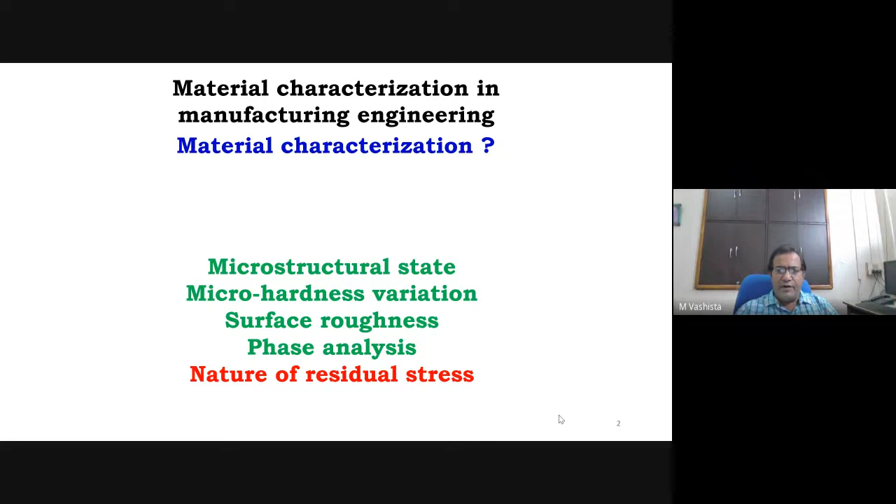Now, why in manufacturing do we have to deal with material characterization? In manufacturing we can use various machines and processes, but is material characterization required? Let us have a look. Generally, we have to qualify the product through a quality control department, which assesses the quality of the manufactured product. When it does so, the term surface integrity is used to indicate the quality of the produced component.

Surface integrity of a product is a set of elements: microstructure, hardness variation, surface roughness, phase analysis, and residual stress. These elements coincide with the elements of material characterization. That is why the quality of the manufactured product can only be assessed by characterization of the material. Hence, material characterization is very important in manufacturing engineering, because we cannot ship the produced component to the market or customer unless we have information about its quality, and this we know only through characterization.

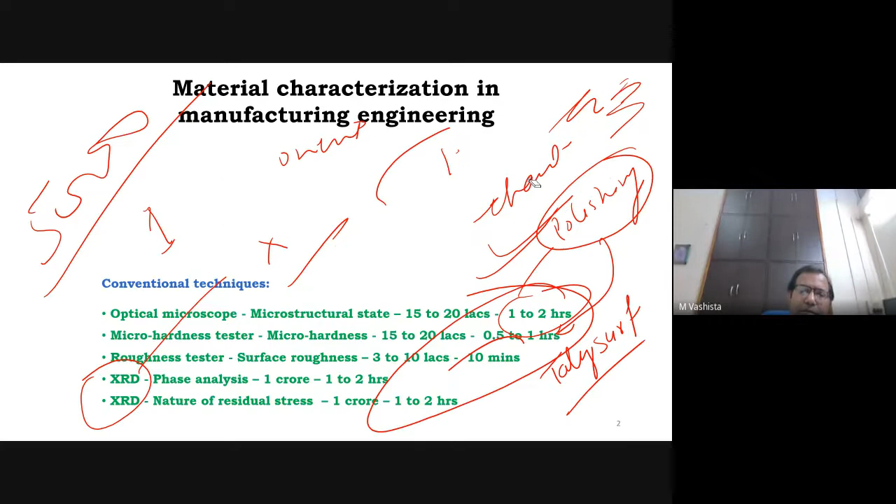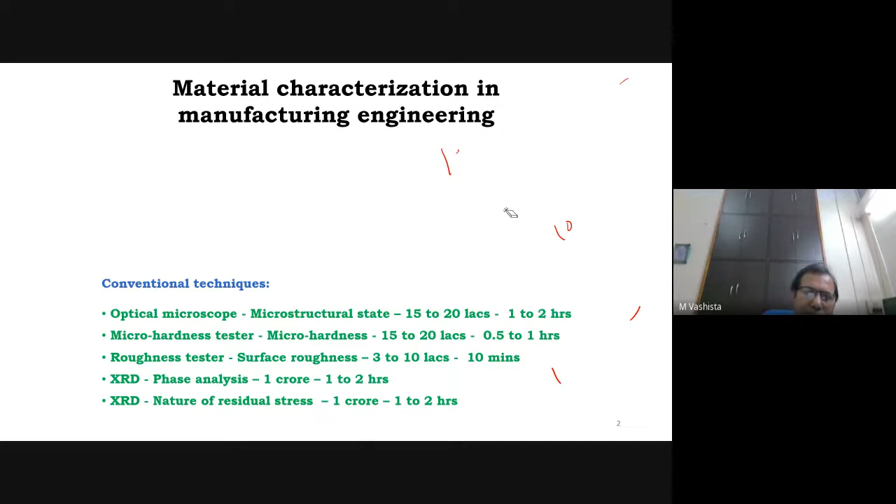We have to replace this technique nowadays. Whenever we are going to submit a project proposal, जब भी हम submit करने जाते हैं किसी project proposal को, then whether it is a DST or whether it is a BARC, it is simply informed to us that the project proposal should be environmental friendly. Okay, if we have to go for development of a product, then we have to say that it is eco-friendly or environmental friendly. So we have to use a technique for material characterization that will be user friendly as well as eco-friendly also.

We have seen that the time taken, if we consider conventional techniques like micro hardness tester, roughness tester, X-ray diffraction technique, is around 3 hours, and that is not possible in nowadays modern manufacturing industries practice, because we have to reduce the time. We have converted our conventional machining center into the CNC machining center by reducing the setup time or holding time. Similarly, we cannot devote such amount of time in quality control. So we have to consider one technique that is having name Barkhausen Noise technique.

The technique, a single technique, can assess micro hardness, it can assess microstructure, phase analysis, even nature of residual stress and its magnitude. Qualitatively, it can inform. It is very much interesting that the time taken to check all these is 5 minutes. The cost of the equipment is 15 lakhs.

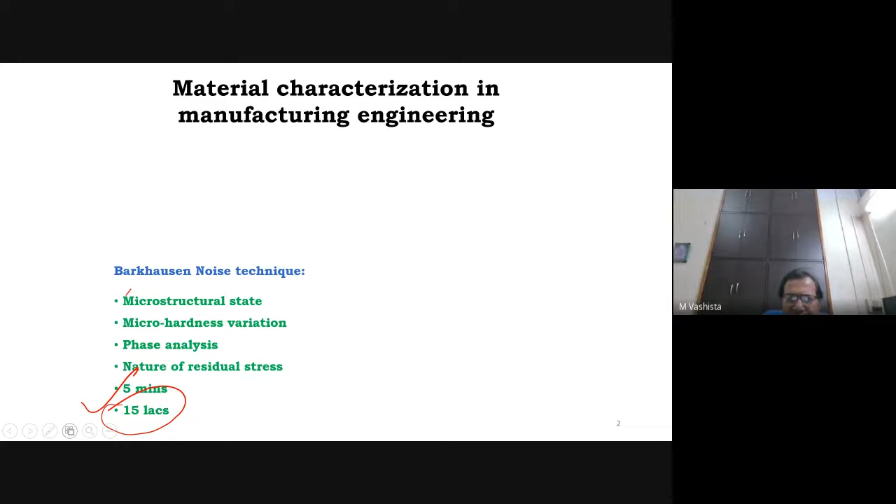Conventional characterization technique, if we look, then first inspection of the product. Whenever we are going to produce a component in machining shop, the first inspection is going to be by naked eye. The visual inspection assesses the color of the component, whether it is having very dark thermal damage portion or not, whether the surface is smooth, whether the surface irregularities are minimum or maximum. That can be carried out by visual inspection. Then micro hardness testing, metallography analysis, and surface finish. These are required to check micro hardness variation, microstructure, and surface irregularities.

X-ray diffraction technique uses a transmitter and a receiver as well as X-ray. So from transmitter, X-ray is transmitted to the workpiece. Then after diffraction, they are received by a receiver, and this receiver informs about the magnitude of residual stress by using Bragg's law. In megapascal, we get the magnitude and nature of residual stress, but the harmful factor is the use of X-ray. The use of X-ray is not desirable.

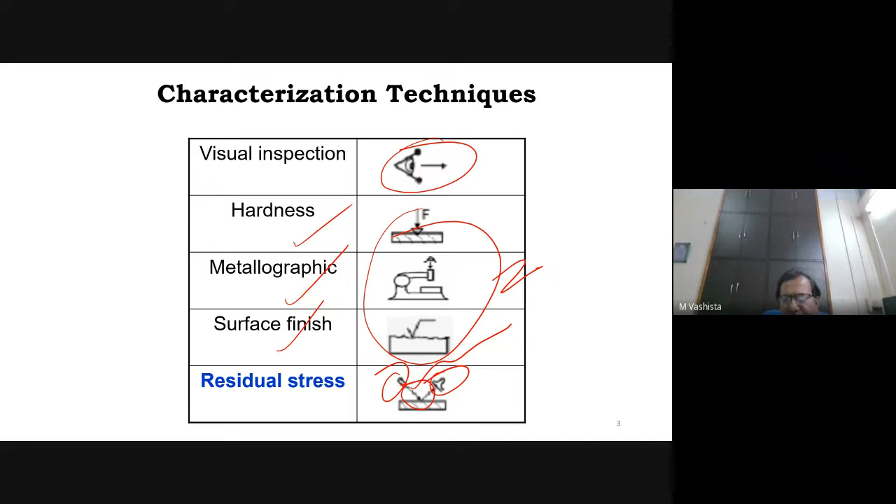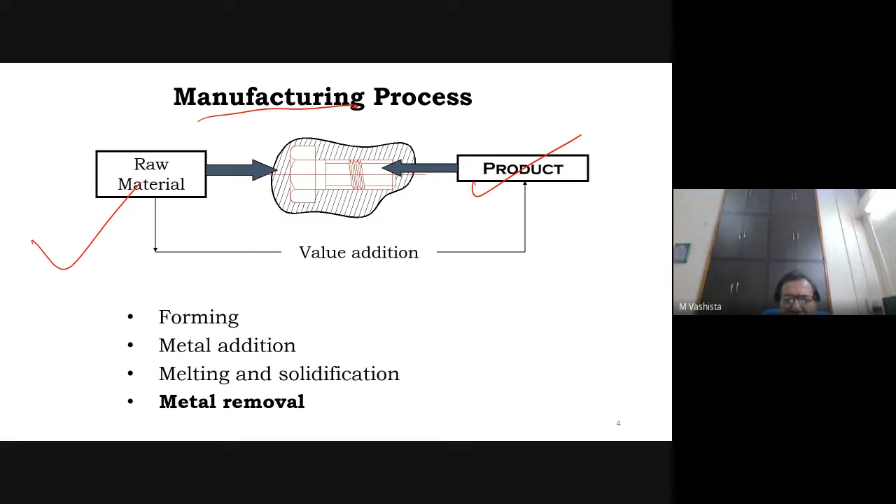Let us go quickly in manufacturing process, because our theme is application of material characterization in manufacturing process to check the quality. If we look into this term manufacturing, then it is simply conversion of raw material into a product by using any process, and there should be value addition. Unless we are having value addition, we cannot declare it is a manufacturing process.

Suppose I am having a lump of iron, and with the help of some compression machine or compression die and punch, I have compressed this component like this, considering this is a very ductile material. So the conversion of shape is there, process is there, but this component after compression is not having any value. Its value is 0. So this is not the manufacturing process. But if I remove these lines by shaper, then I will get a rectangular piece. And this rectangular block I can use as a paperweight at least. In this case, value addition is there. So this will be a manufacturing process.

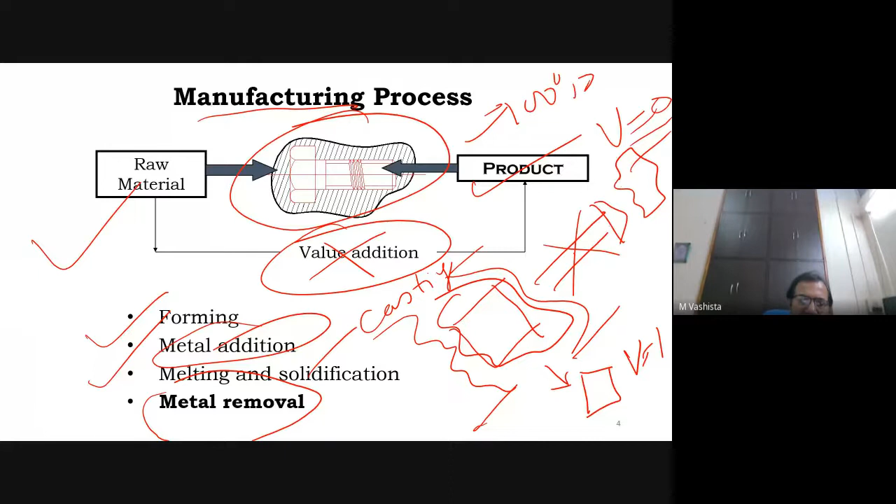Manufacturing process we can easily classify into forming, metal addition, that is welding, soldering, brazing, melting and solidification, means casting process, and last one is metal removal. This intentionally I have kept in bold color, because if I consider manufacturing process as 100% proportion, then this portion takes major portion of manufacturing process. Global study has indicated that 60 to 65% of manufacturing operations are carried out by metal removal category. It means machining category. So this is very important in manufacturing.

And unfortunately, if I consider any metal removal process like drilling, boring, threading, knurling, turning operation, milling operation, shaping operation, in all these operations there is contact between the workpiece and the cutting tool, and large amount of heat is generated. Heavy plastic deformation, large amount of heat generation, it is not desirable. Why it is not desirable? Because it will change the property of the material non-uniformly, and this is not required by the customer. The non-uniformity in property is not good for a field application.

In field application, the component will be exposed to the rainy condition, extreme cold condition and extreme summer condition also. If it is having non-uniform property, then definitely it will fail during its service life. So we have to characterize the material before we serve it in field application, or before we supply it to the customer.

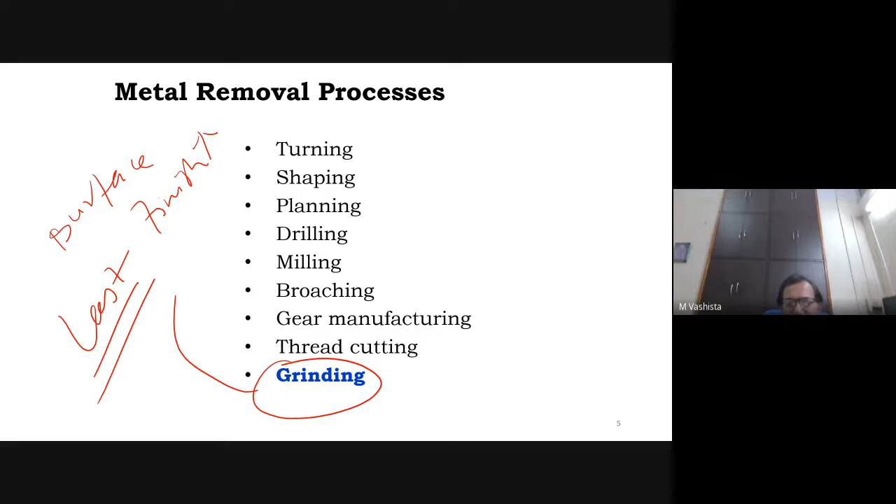Among these processes, grinding process is very important, because this is the last machining process. It is the last tooling process. After completion of this process, we will get good surface finish. Surface finish will increase after grinding process, because we say it is a finishing operation. But remember, it is a finishing operation, but it comes under metal removal category. So it is the last process. I have considered this process only to highlight the importance of material characterization. Okay.

Grinding process is the last tooling process, and it governs the quality of the component, because after this process the machining or manufacturing part gets complete and the product goes to the quality control department.

Unfortunately, in grinding this thing happens - generation of spark that we have all seen, and this spark is very detrimental.

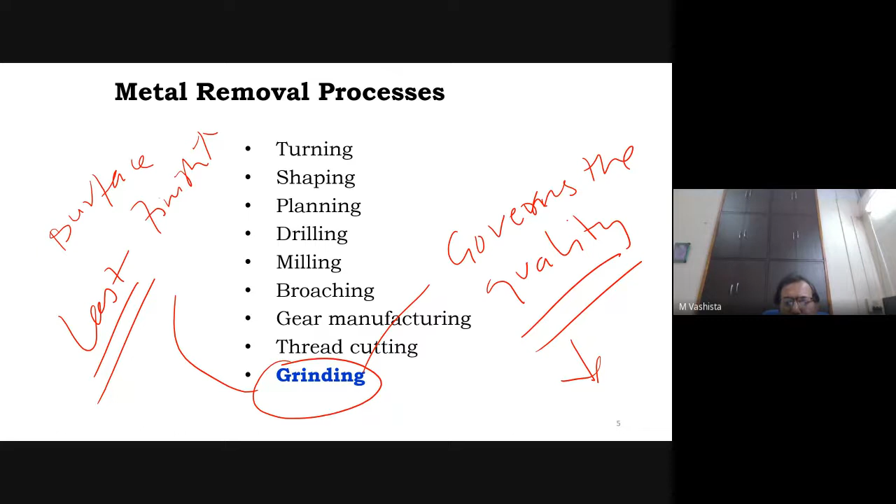Considering turning process, shaping process, planning, drilling, milling, broaching, thread cutting, gear manufacturing - in these processes spark is not generated. But only in the last manufacturing process, or last tooling process, sparks are generated.

The process that provides high surface finish quality to the component is the same process generating spark. Spark means intense heat over the top surface of the component. This intense heat application will definitely create thermal damage, and it will distort the quality of the manufactured component.

Why is this spark generated? Let us find out, then we will go about the material characterization. In grinding process, whenever there is contact between the grinding wheel and the workpiece surface, immediately at the contact we see spark generated, even without giving depth of cut. So why is this spark generated in grinding?

This is the schematic diagram of a grinding wheel and workpiece. Grinding wheel is composed of a binder. It also has abrasive grit, and it also has porosity. So grinding wheel is composed of binding material, abrasive grit, and porosity.

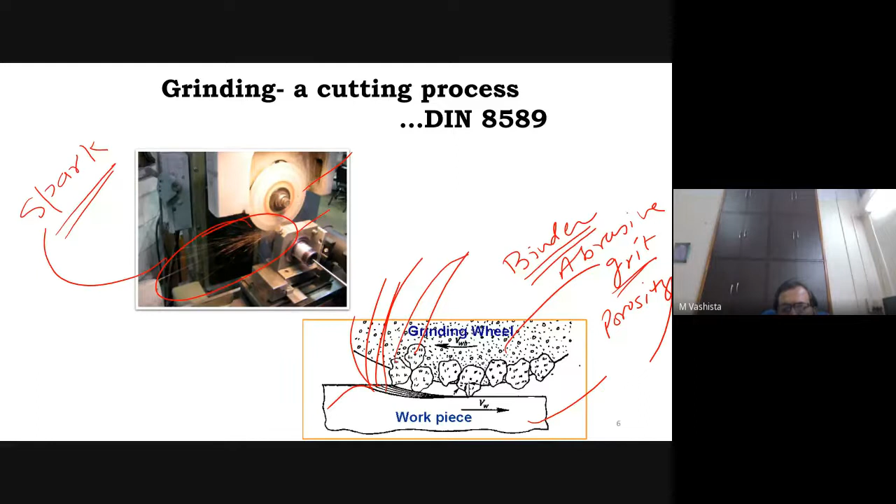So what happens with this abrasive grit of irregular shape and geometry? They are used to remove material in a layer-by-layer fashion, visible from the top surface. But still the question is: why is this heat generated by abrasive grit? Let us first talk about something related to tool geometry.

I am considering a cylindrical workpiece, the side view. A turning operation is carried out over this cylindrical workpiece. A single point cutting tool is making contact with the cylindrical workpiece so that the turning operation can be carried out.

Single point cutting tool can be positive rake or negative rake - positive rake and negative rake. How can we declare whether it is positive rake or negative rake?

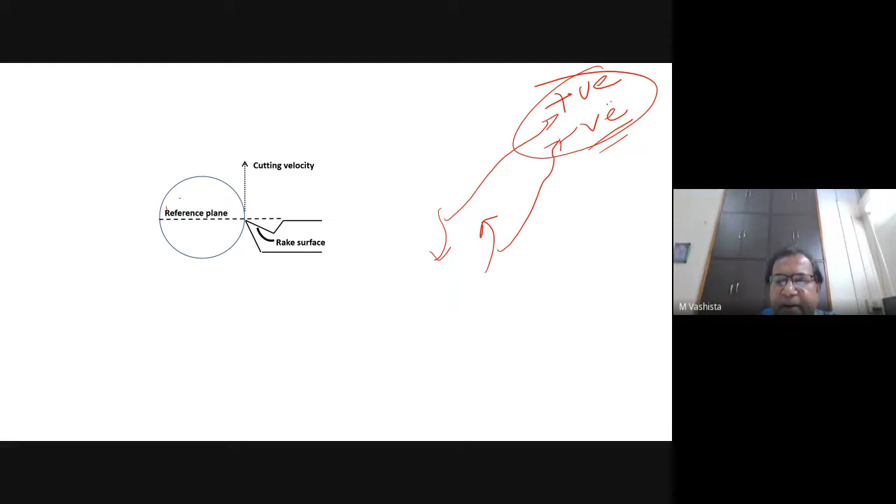Now, how do we decide if it is positive rake or negative rake? This is the interesting fact. Always rotate the reference plane toward the rake surface. If this direction of rotation is clockwise, it is positive rake. If the direction of rotation is anti-clockwise, it is negative rake. This is the simple fundamental we have to keep in mind: rotate the reference plane toward the rake surface.

So in this case, this rotation is in this direction, which is the clockwise direction. So this angle is positive rake.

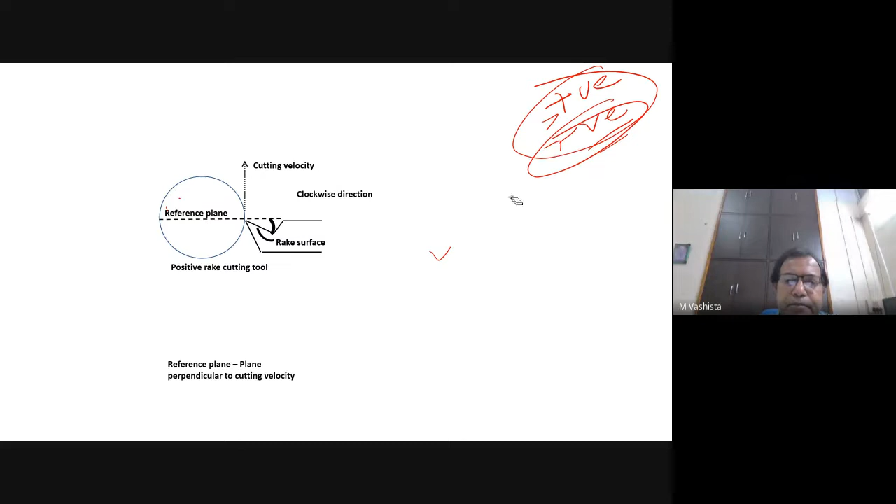Considering another example, the shape of the tool is like this. We will go by the fundamental. First, we have to locate the contact point. This is the contact point. We have to draw a tangent to indicate the cutting velocity, so the tangent will indicate the direction of cutting velocity. After showing the direction of cutting velocity, we can easily locate the reference plane. This is the reference plane. It is a plane perpendicular to the cutting velocity.

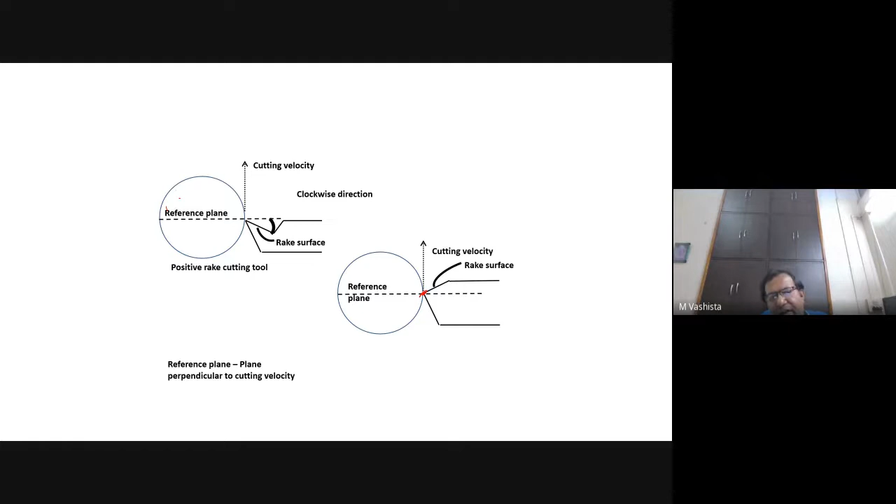Rake surface location is here. In this case, again, we have to rotate the reference plane toward the rake surface to see whether it is a clockwise or anti-clockwise direction. If it is a clockwise rotation, then it will be positive rake. But in this case, when we are rotating the reference plane toward the rake surface, it is negative rake because it is anti-clockwise direction. So this anti-clockwise direction indicates this is a negative rake cutting tool. Positive rake cutting tools and negative rake cutting tools are very popular in machining.

Whenever we have to say the difference between positive rake cutting tool and negative rake cutting tool, we typically say that in case of negative rake cutting tool, a large amount of cutting force is generated. Why are large amounts of cutting force generated in negative rake cutting tool? Somewhere I have seen it explained as more penetration area or more contact area, that is the reason for this more cutting force in case of negative rake cutting tool.

But we have to look into the fundamental. We have to apply the physics fundamentals to verify or validate this fact, that in case of negative rake angle, the amount of cutting force will be large.

Consider a chip. This is a chip, it is coming out from this workpiece material. So here it is the portion of the workpiece material, and after failure or after going through the shear mechanism, it will separate out from the workpiece material and it will flow over the rake surface like this.

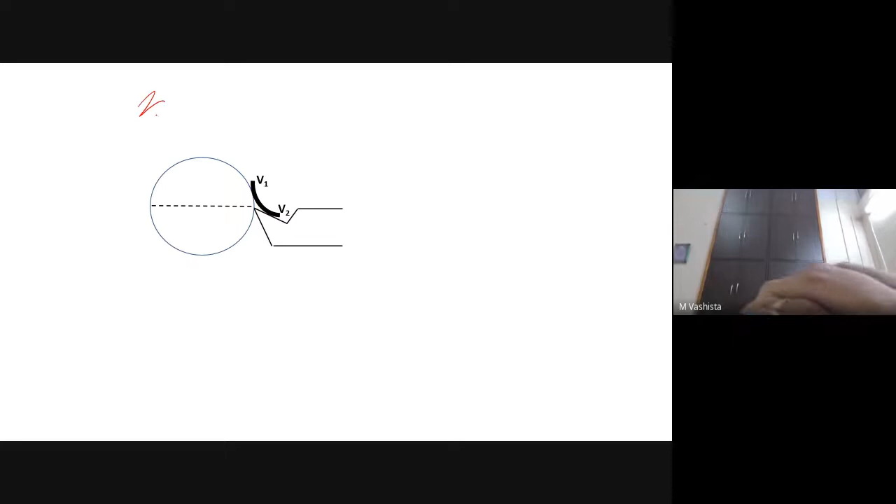The direction of flow of the chip has been indicated. When the chip is a part of the workpiece, it is having velocity V1, and when it is rubbing or moving over the rake surface, it is having a different velocity. That we know very well, chip velocity before cutting and chip velocity after cutting. So the same designation I am using here: V1 is the velocity of chip before cutting and V2 is the velocity of chip after cutting. I am considering this as an element having mass m, this chip is having mass m, its mass is small m.

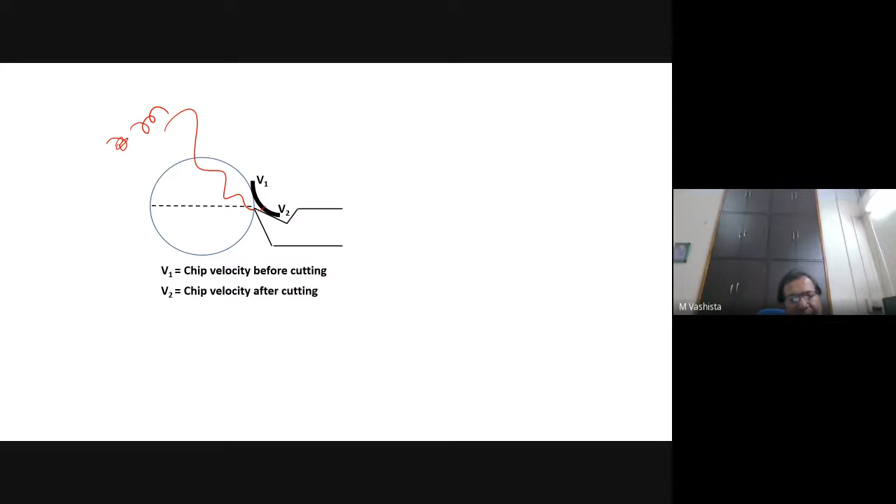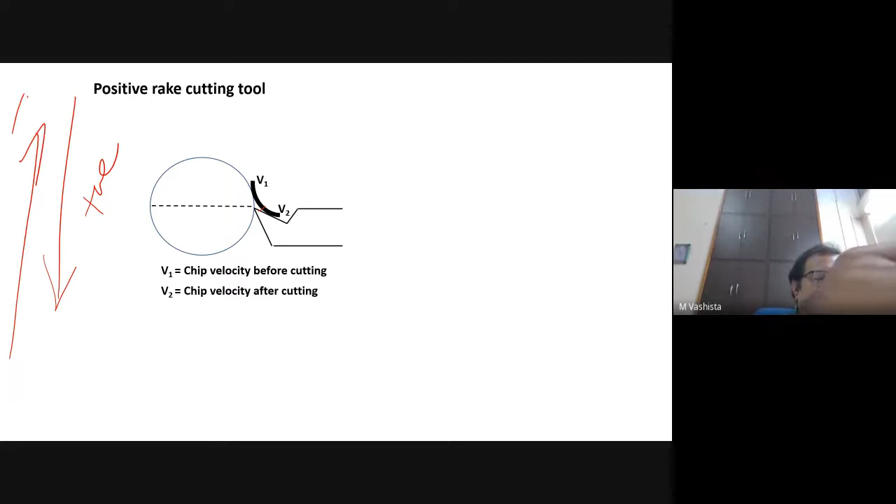V1 is chip velocity before cutting, V2 is chip velocity after cutting. In case of a positive rake cutting tool, this is the schematic. I am considering downward direction as positive and upward direction as negative. So in this case, V1 is in downward direction, V2 is also in downward direction, and the component is in downward direction.

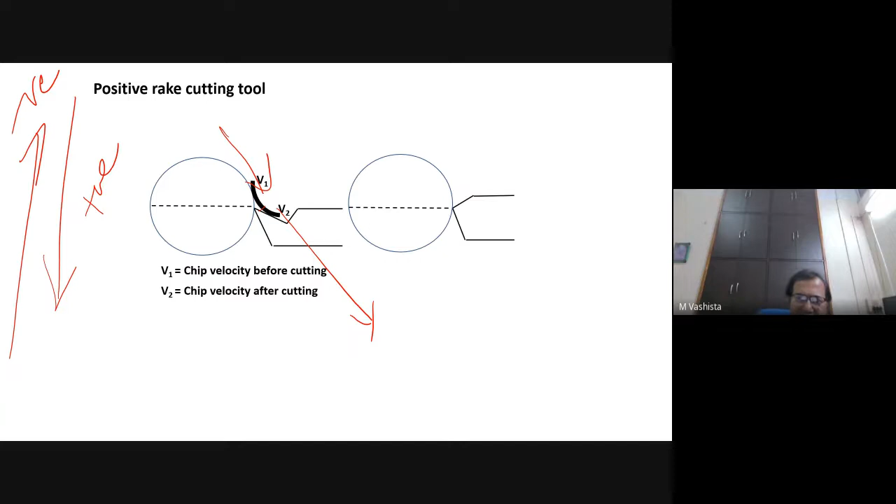But if I consider the same machining operation using the same workpiece and same process parameters, but simply replace the positive rake cutting tool with a negative rake cutting tool, what will happen? The direction of flow of chip will change. It will be like this.

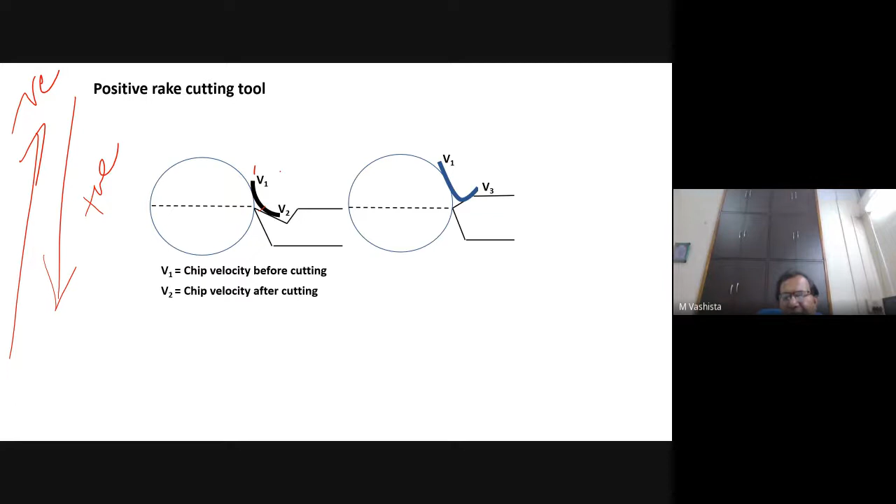Again, since process parameters and workpiece are the same, the initial velocity will still be V1, but the final velocity will not be V2 - it will definitely be different. Suppose it is V3. So V1 is the chip velocity before cutting and V3 is the chip velocity after cutting in case of negative rake cutting tool.

Considering the positive rake cutting tool, change in momentum is mv1 minus mv2, since momentum is the product of mass and velocity. We know that the amount of force is directly proportional to momentum, so there is a direct correlation between force and momentum. In case of positive rake cutting tool, change in momentum is mv1 minus mv2, and in case of negative rake cutting tool, change in momentum will be mv1 minus minus mv3.

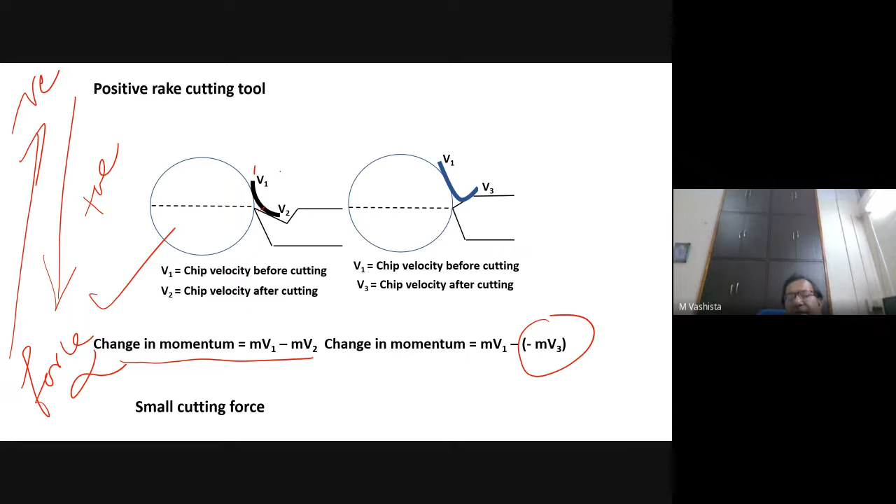Why? Because this is downward direction and this has an upward component. Since I have taken upward as negative and downward direction as positive, I will have to write change in momentum as mv1 minus minus mv3. So what will happen? This amount will definitely be more than the other. This indicates that a larger amount of cutting force will be generated in case of the negative rake cutting tool.

The same principle is also used for this very essential step of manufacturing. Whenever we have to perform a turning operation, we have to follow one guideline: we must ensure that the contact point is exactly at the diametric plane.

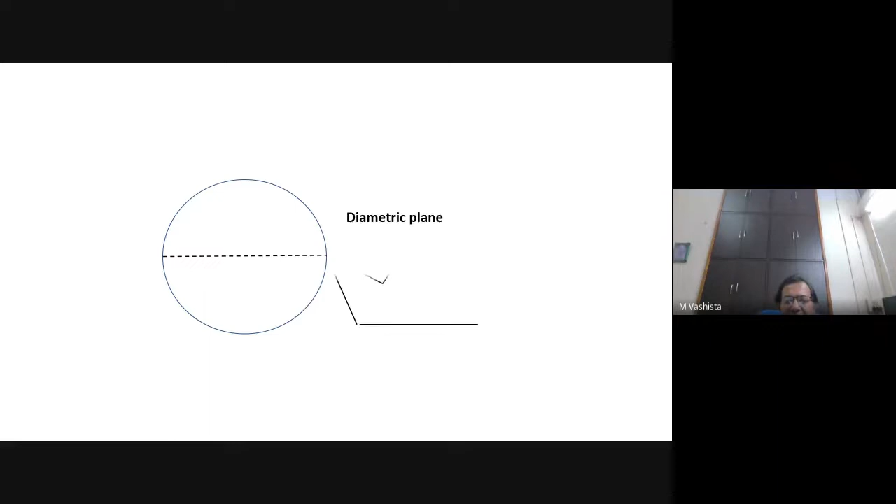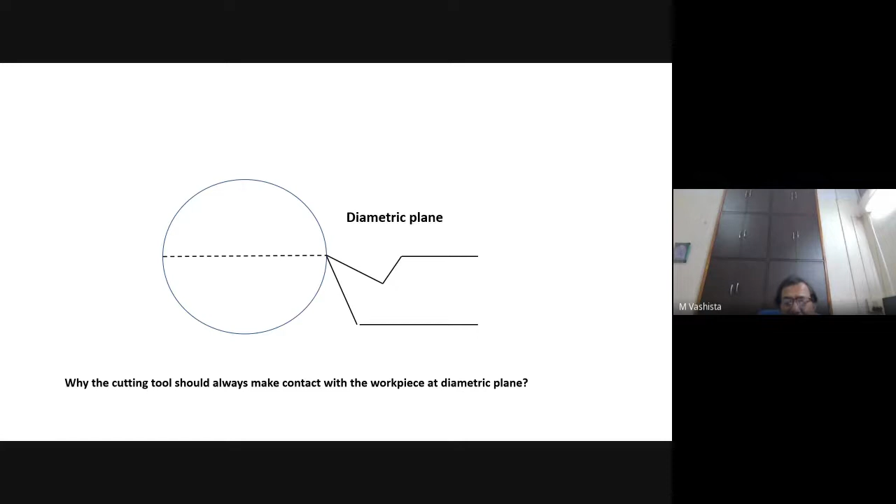But why are we told that the contact point between the cutting tool and the workpiece should exactly be at the diametric plane? This contact exactly at the diametric plane requires a hit and trial method, and it will also take a lot of time. So why is it required? It is again related to the same fundamental principle we have just seen.

Suppose the contact point is exactly at the diametric plane for a machining operation. The supervisor or manufacturing engineer told the machinist or operator running the lathe machine to use a positive rake cutting tool, with that positive rake being 10 degrees. You have to perform this machining operation with a positive rake cutting tool having a 10 degree rake angle. So the operator issued this tool from the tool shop, or received it from the dealer, and started his machining.

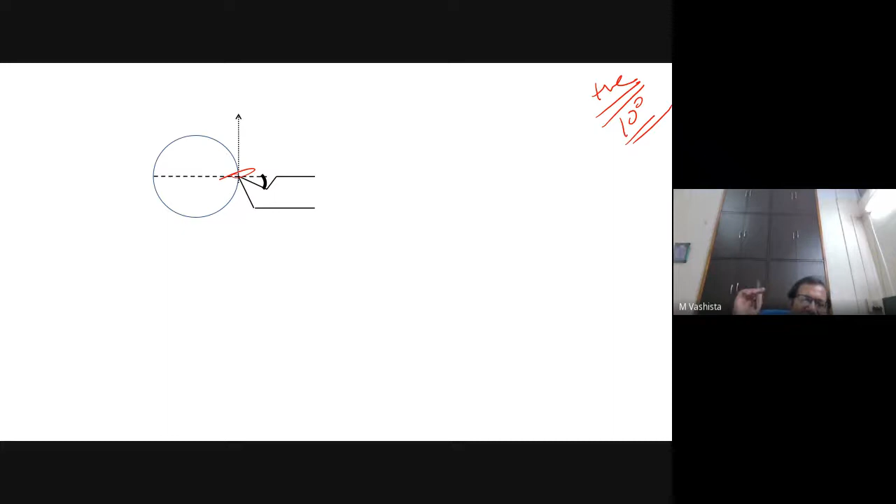First case I am considering: the contact point is exactly at the diametric plane. In this case, this will be the rake angle. Rake angle is the angle of inclination of the rake surface from the reference plane - the angle between the reference plane and rake surface. So this rake angle will be exactly equal to 10 degrees.

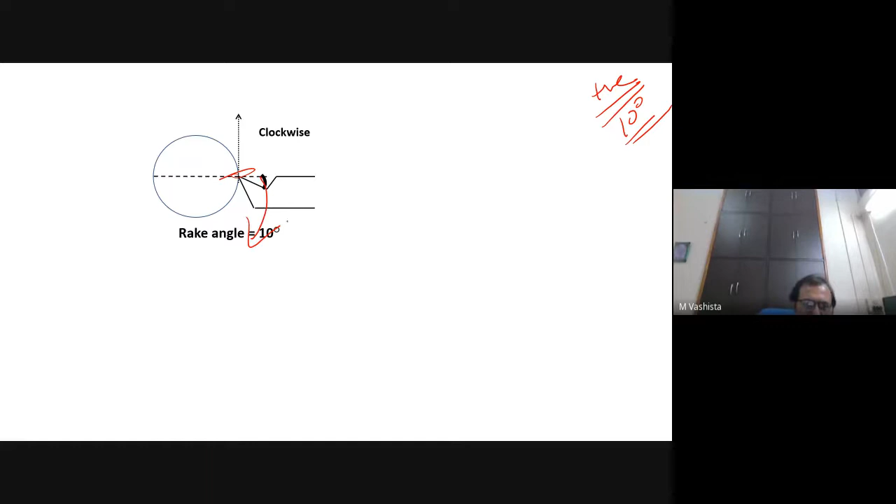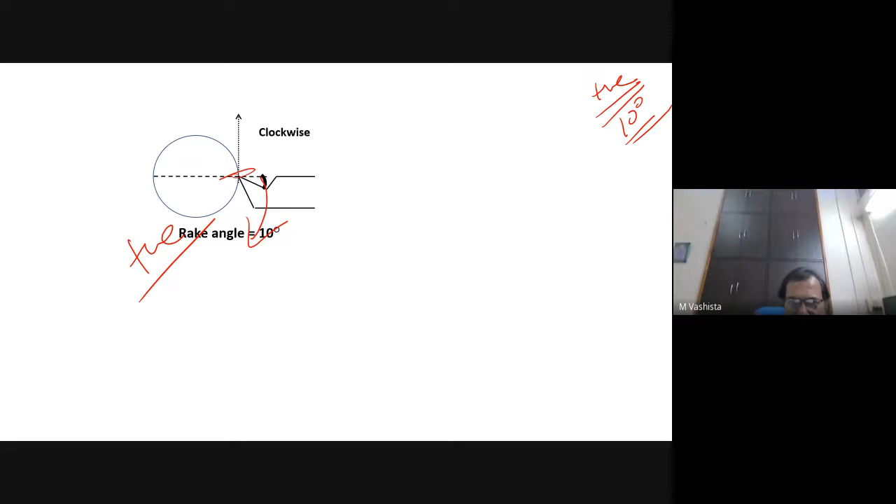And this rotation is simply in the clockwise direction. The direction of rotation of reference plane towards rake surface is clockwise, so this will be a positive rake. But by mistake, if the operator does not make contact exactly at the diametric plane, then what will happen?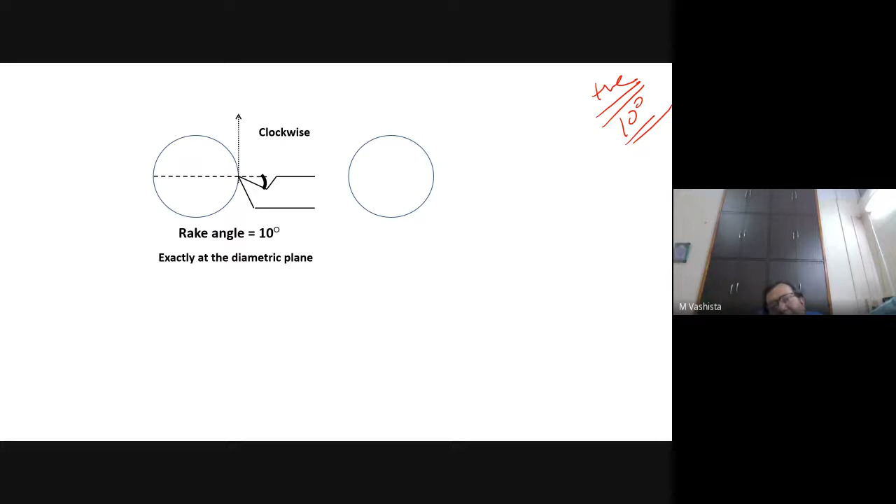There will be two cases: either the contact point will be above the diametric plane, or it will be below the diametric plane. In each case, what will happen? The first case I am considering is when it is above the diametric plane. So I will apply the same fundamental. First, I have to locate the contact point - this is the contact point.

At the contact point, I will first draw a tangent to indicate the direction of cutting velocity. So this is the tangent at the contact point, indicating the direction of cutting velocity. When I have the direction of cutting velocity, I can locate the reference plane - it is a plane perpendicular to the cutting velocity. Now, after locating the reference plane, this angle between the reference plane and rake surface has increased.

So I have got a tool that is having 10 degree rake angle, but by mistake I have shifted the location point. So I am performing the machining operation with a tool that is having large rake angle, positive rake angle. This large positive rake angle, maybe 15, and that is not desired by the supervisor or the manufacturing engineer, who has informed the operator that you have to carry out the operation with 10 degree rake tool.

Unfortunately, what will happen when the contact point will be below the diametric plane? In this case, the contact between the cutting tool and the workpiece is below the diametric plane. Fundamental I will follow. Again, I will draw a cutting velocity vector at the contact point. This is the direction of cutting velocity vector. I will have to draw reference plane. Reference plane is nothing but a plane that is perpendicular to the cutting velocity. So this is the plane.

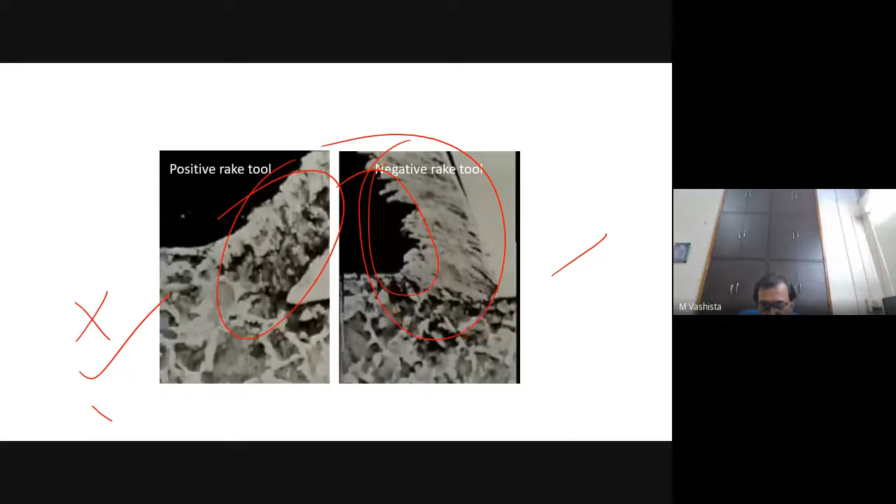In negative rake cutting tool, amount of plastic deformation is quite large. The thickness of the chip is large. Serration mark, you can see these are the serration marks, zigzag marks. So these are also very large, very significant in case of negative rake cutting tool. So we can say that cutting force is very large in case of negative rake cutting tool. Plastic deformation is very large in case of negative rake cutting tool. Hence, large amount of heat is generated, and this heat is not desirable.

So why are we discussing positive rake, negative rake in this topic, in this talk? Because the heat generation or the spark generation in grinding is related with this fundamental. The fundamental that we have discussed just now regarding the negative rake cutting tool, it is mainly responsible for generation of spark in grinding process.

When we provide the negative rake cutting tool over the single point cutting tool or milling cutter, then we keep the negativity in low range, typically minus 15 degree, minus 10 degree, minus 8 degree like this. Because higher negativity will indicate large amount of cutting force with significant plastic deformation. So we have to keep this in low range, generally below minus 15 degree. What happens in case of grinding?

To explain, I am using a grinding wheel. This is the grinding wheel, and I am considering only a single abrasive grit. To explain the generation of spark, I am considering a single abrasive grit because it is acting as a cutting tool. So I am having a pyramidal shape cutting tool. Although the abrasive grits are having irregular shape, experimental results and simulation results indicate they are having semi-pyramidal shape like this. So I am using a semi-pyramidal tool that is known as abrasive grit.

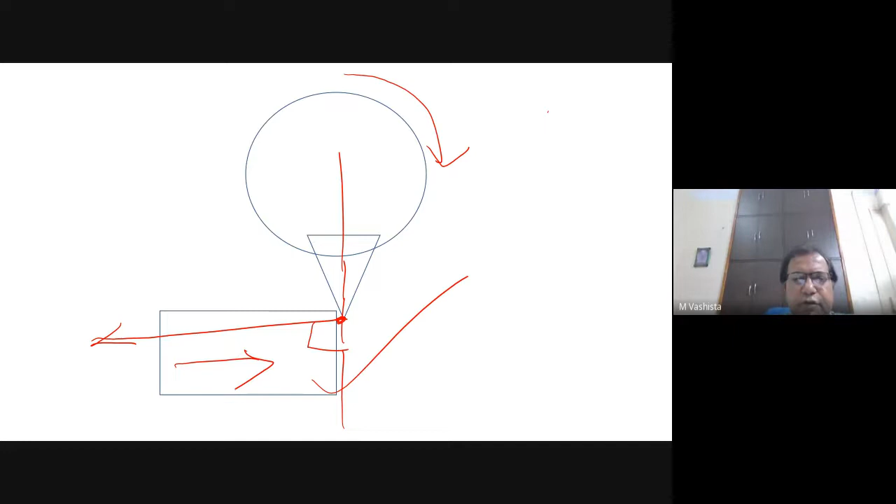This is the reference plane. This plane is perpendicular to cutting velocity. So this plane is reference plane. Chip that will be generated during grinding, it will go like this. So this chip is flowing or rubbing over this face. So this face will be rake surface.

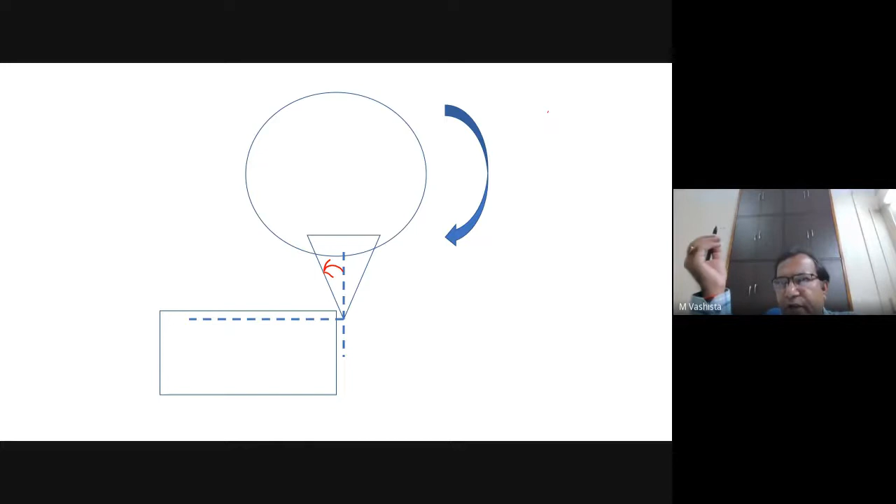Okay, so this surface is the rake surface. Velocity vector I am having, reference plane I am having. Same fundamental I am applying. Rotate the reference plane towards the rake surface like this. If this direction is clockwise, it is positive. If this direction of rotation is anti-clockwise, it is negative. So now I can declare it is a negative rake.

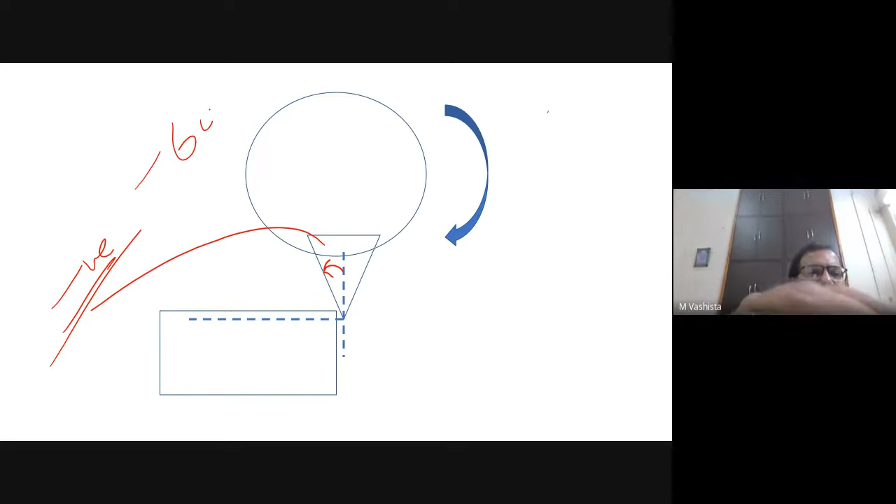And this negativity I cannot control, nobody can control, because these are irregular shape abrasive grits, and experimental results indicated that this negativity is very high, approximately around minus 60 degree. So you are using a cutting tool in grinding that is having negative rake, and its negativity is very high, approximately minus 60 degree, and you are helpless to use this because you cannot reduce this.

That is why a large amount of spark is generated in the top layer of the workpiece, and this spark will damage the top layer of the workpiece, and we have to characterize this top layer because now the component will be shipped or transferred or supplied to the customer.

So our task is to analyze the top surface that has got the thermal damage because of the spark of grinding. So why is this characterization required? Because intense heat has changed or altered the material property at the top surface.

In this schematic, again we can see abrasive grit, cutting velocity, reference plane, rake surface. Now you can see this angle is quite negative. This large negative rake angle leads to large cutting force, and this will generate heat. And that is not desirable. Heat can be transferred to various nearby components.

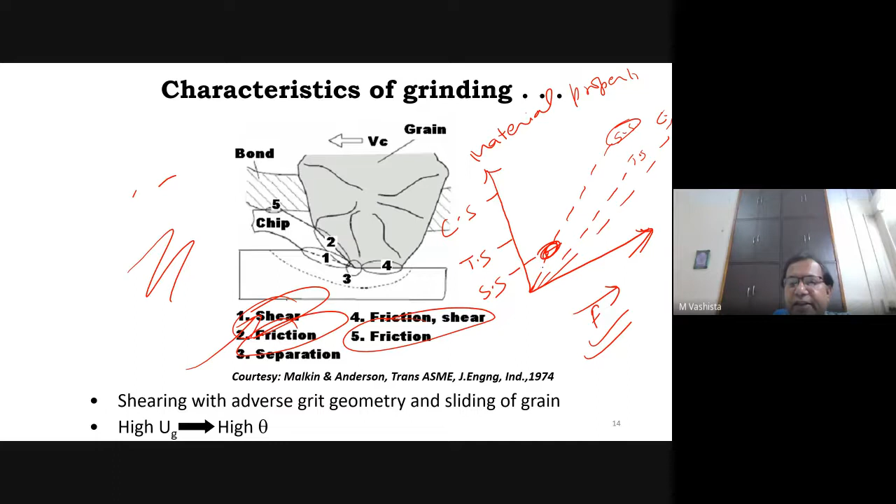Now look into this figure carefully. What is happening? This shear stress and this shear strength. At this point, shear stress is matching with the shear strength of the material. Suppose this is 120 Newton load. So at 120 Newton load, first the shear stress will meet the shear strength. So the failure will occur because of the shear stress.

The point where tensile stress will meet the tensile strength, suppose it is 200 Newton. And the point where the compressive stress will meet the compressive strength will be 400 Newton. These points will not be reached because the failure will already occur, because shear stress will meet the shear strength of the material earlier, at a rapid rate. That is why we declare that it is the shear failure of the material in machining.

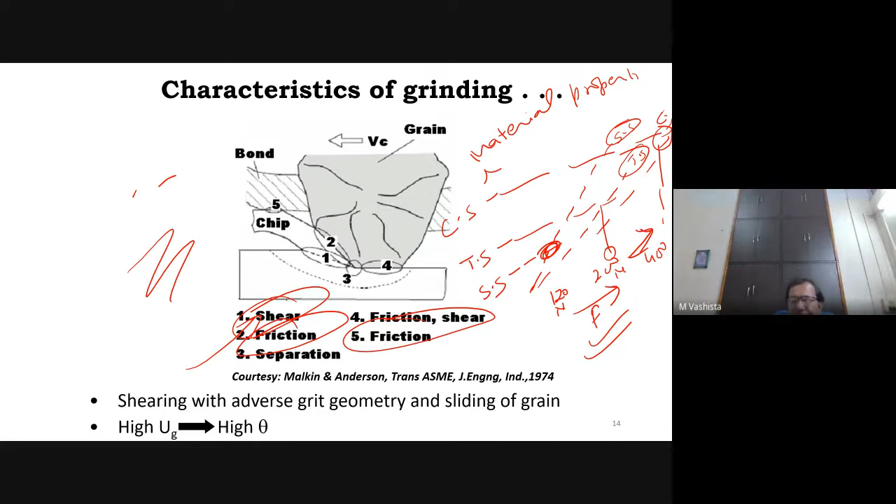The heat that is generated in grinding may go towards the abrasive grit because it is in direct contact. Some amount of heat will be carried out by the chip itself. Coolant and environment will also take some amount of heat, but remember, it is the transfer of heat toward the workpiece. In grinding, the heat is transferred to the workpiece significantly.

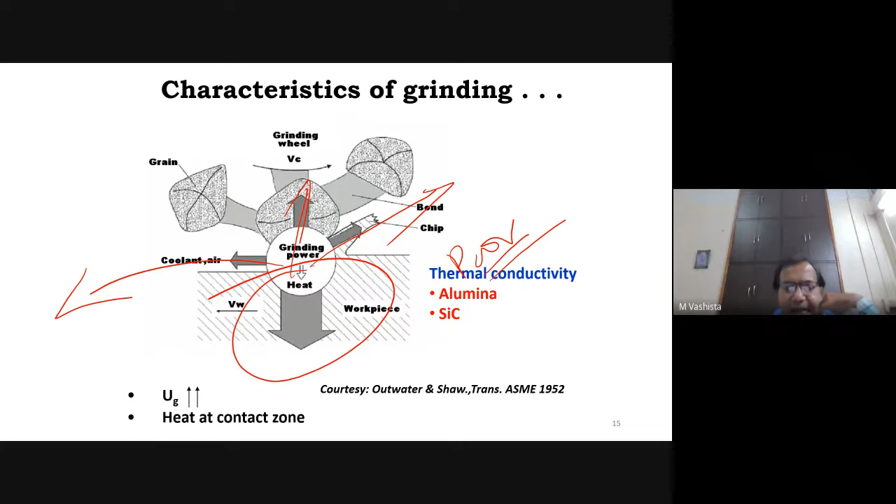Abrasive grit, typically we use alumina or silicon carbide, and they have poor thermal conductivity, so they will not take a large amount of heat. Very less heat will be transferred into the abrasive. Hence, the large amount of heat transmitted into the workpiece will damage the workpiece detrimentally. And this grinding heat will cause elevated temperature in the form of thermal damage.

Considering this is a grinding machine, and a rectangular workpiece, I can say that surface texture will change, and because of the thermal damage, residual stress of tensile nature will be generated. Microstructure will be different. At the top surface, microstructure will be retained martensite or retained austenite, and the bulk material is different. Whenever we say the top layer has martensite, it is evil. It is not good. Martensite is a very brittle layer.

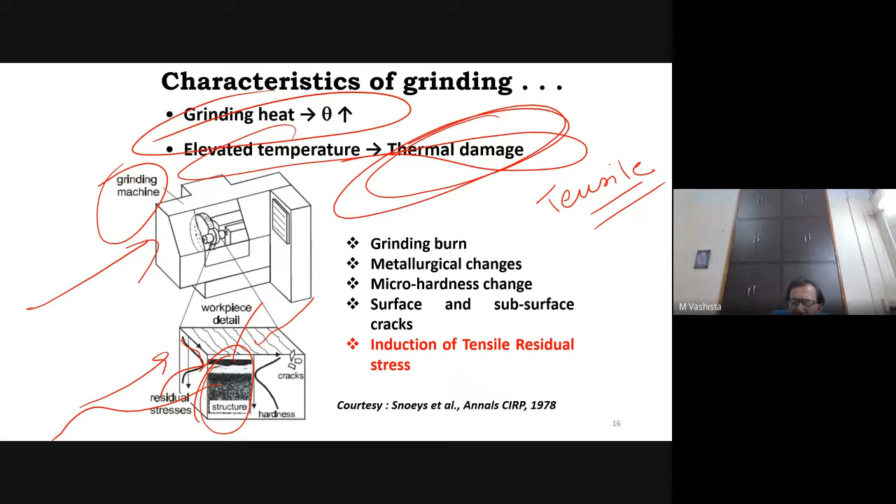If the top surface has a martensite layer, which is very hard and brittle, the chances of crack formation will be more. And if a crack is generated in a brittle surface, its propagation will be very easy, because brittle materials do not have enough internal energy to arrest the propagation of crack. So in brittle material, the crack will be immediately transferred deep into the bulk material.

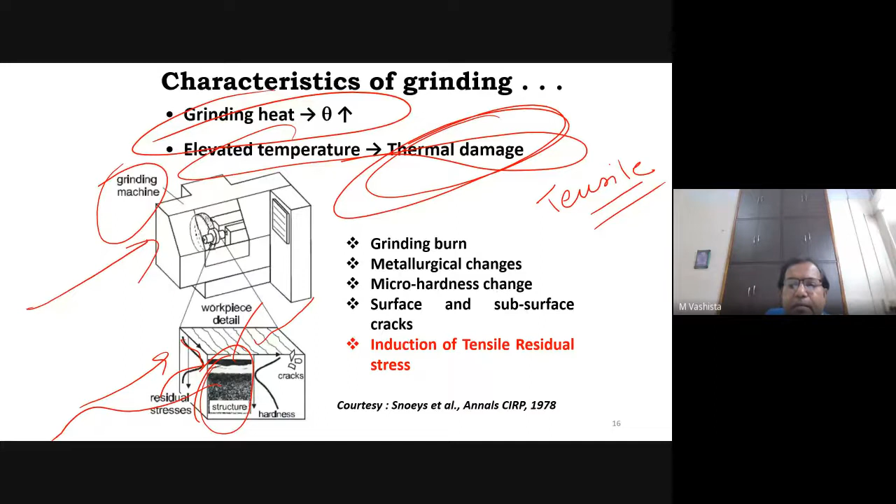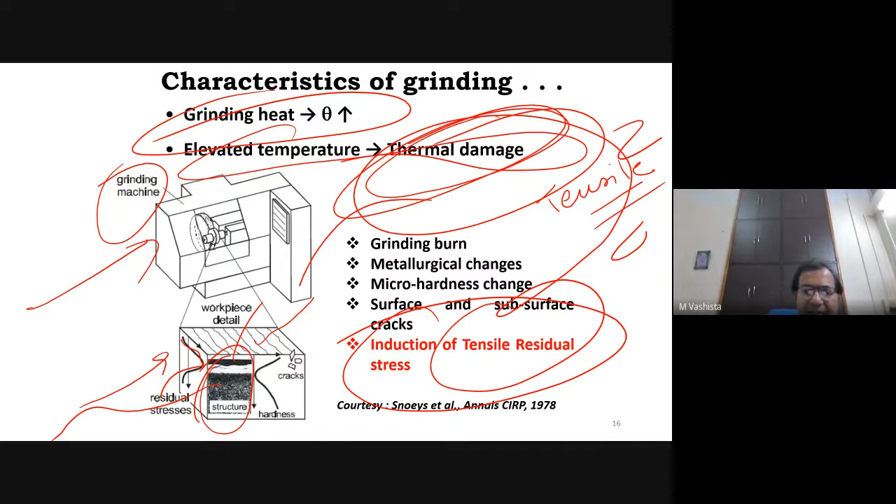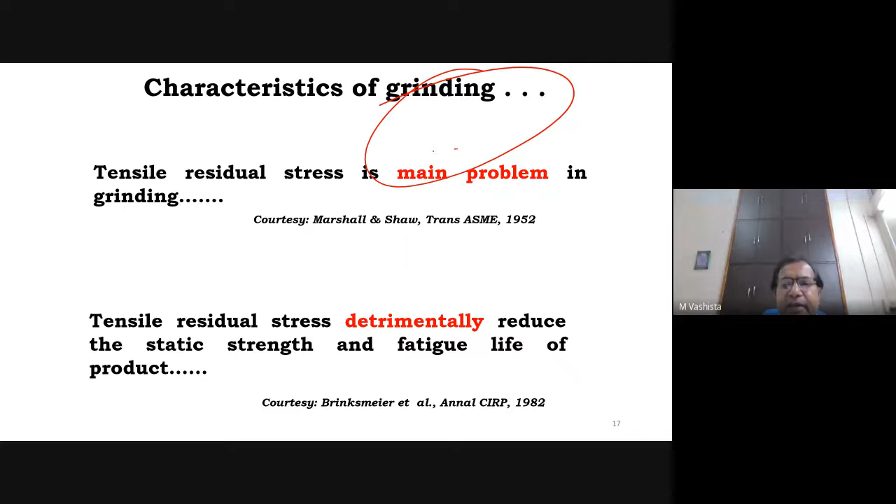Microhardness variation will be there because the top surface has a different microstructure. Cracks will be there. Because of the heat, thermal damage, tensile residual stress will be generated. Hence, to assess these, we have to characterize the material. Scientists working on assessment of residual stress have clearly declared that in grinding, tensile residual stress is typically generated, and that is the main problem, because it will detrimentally reduce the static strength as well as fatigue life of the product.

This reduction in static strength and fatigue life will ensure that the material fails before completion of its service life. Sometimes this failure is catastrophic in nature, and that will be very detrimental for human life, especially if we are considering railway tracks or railway bridges.

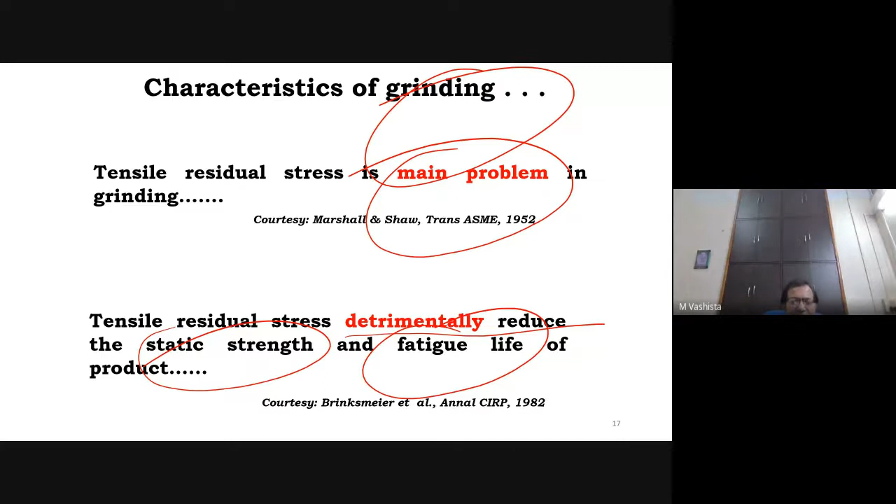So, if we look into the lecture till now, we can say that characterization at micro level is required in manufacturing because grinding is the last tooling process, and this last tooling process generates spark and heat. This heat will damage the top surface, whose thickness may be micro level or macro level. But our aspect is we have to characterize the component to supply it into the market.

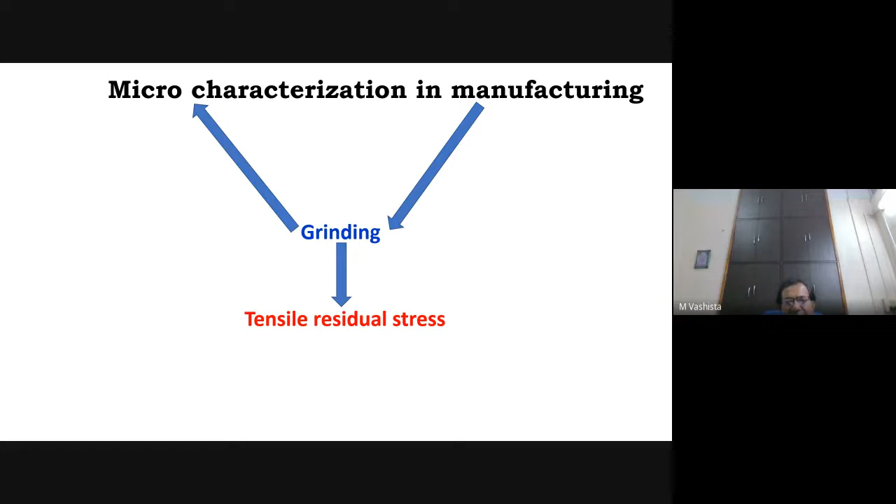Unfortunately, grinding is the last tooling process, and it is very much required to assess the correct quality by characterizing the material at macro and micro level. And we have just seen that because of tensile residual stress, workpiece static strength and fatigue strength will get reduced. Why is tensile residual stress detrimental?

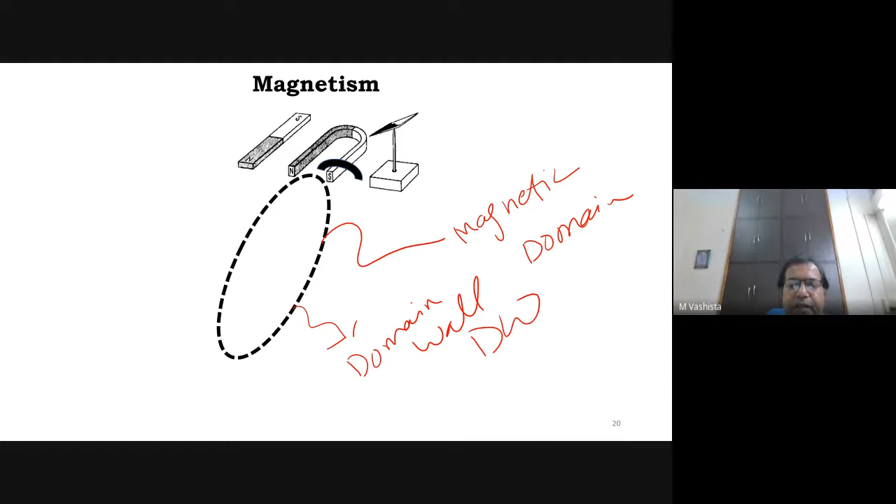And a permanent magnet produces a magnetic field. The magnetic field has a boundary. Only within this boundary can the effect of the magnetic field be felt. If an iron component is beyond the boundary, then it will not be attracted toward the magnet. But if the component is inside the boundary, then it will be attracted toward the permanent magnet. So this boundary in which the magnetic field can be felt is called the magnetic domain. So this domain wall is the boundary of the effect of the magnetic field.

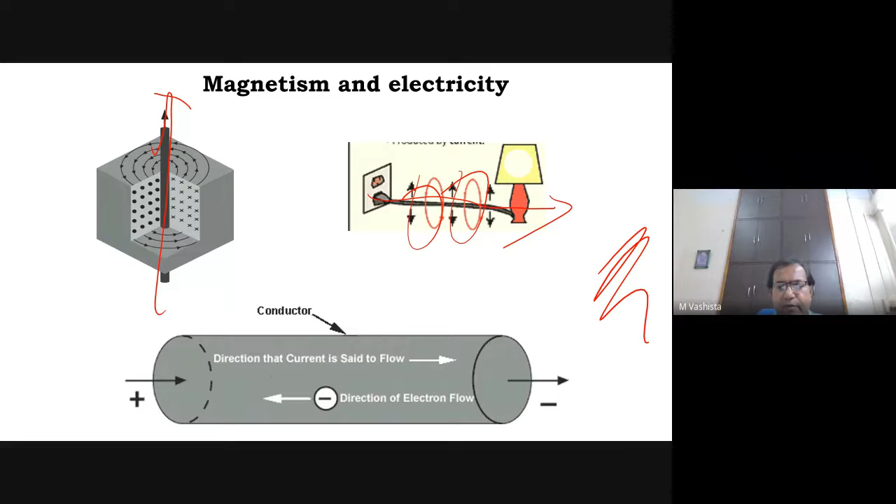So I can say that current is producing a magnetic field. What is current? Current is flow of electrons. So the flow of electrons will create a magnetic field. Any flow of electrons will create a magnetic field. Remember, in a material, electrons are moving around the nucleus. Since this is also motion of electrons, this will again create a magnetic field.

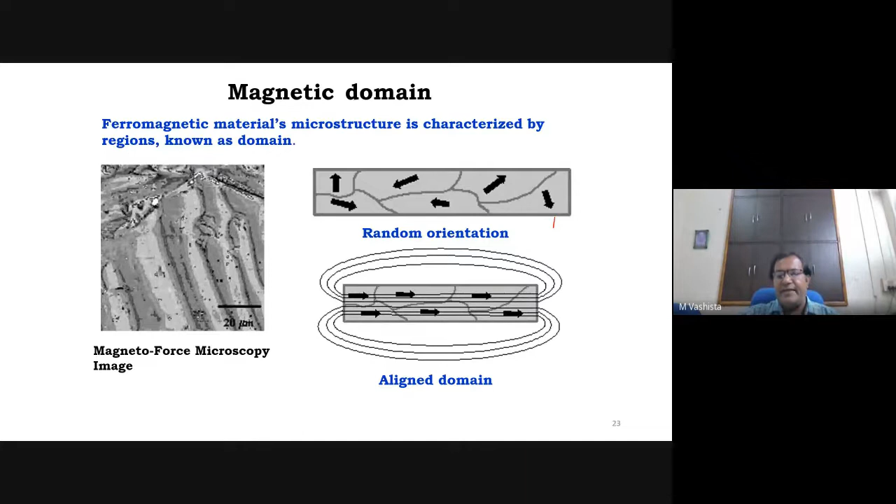So in this case, when these magnetic domains move to align themselves in the direction of the magnetic field, this motion will generate a magnetic field, a signal, and this signal can be captured by a sensor in the form of a signal.

And this signal is very important for checking the microstructure, micro hardness and residual stress of a component. Old doctors used to check the health of the patient by checking the pulse of the right hand. Similarly, we can use this signal for checking the health of the material or for characterizing the material. How can we use this signal for characterization of material?

This signal was first seen by Professor H.G. Barkhausen. He was a German professor and he initially detected this signal with the help of a loudspeaker. So this signal is known as Barkhausen noise, and the word noise is coming from the loudspeaker. This initial experiment is available on Google. You can have a look at it if you type in Google or YouTube "initial experiment of Professor Barkhausen setup." You can demonstrate this experiment in a UG class, or in a PG class you can give a project using this experimental setup.

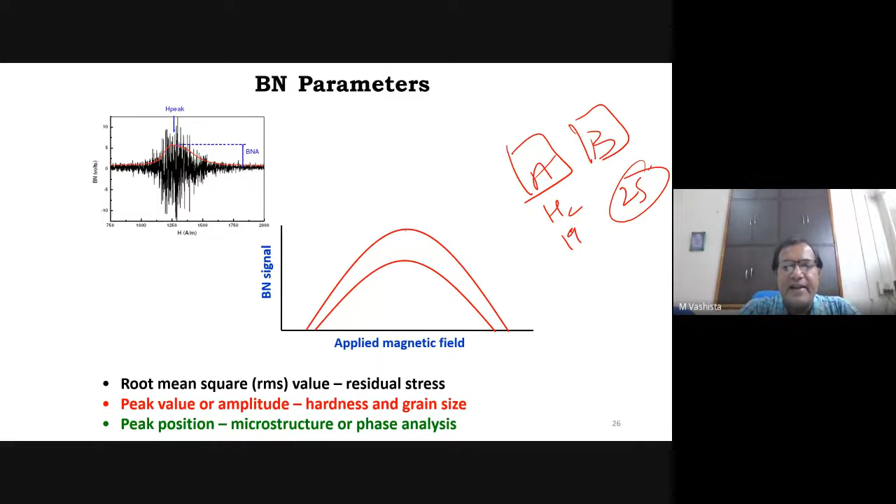I am considering two examples. Suppose I have two components, A and B. Component A's hardness is HRC 19, suppose, and B's hardness is 25. So it has larger hardness. Hardness means grain boundary, grain size. So it has more grain boundary. Grain boundary means a hurdle to the motion of the domain wall. When there are more hurdles to the motion of the domain wall, the signal will reduce. So I will get a smaller signal if the hardness is more.

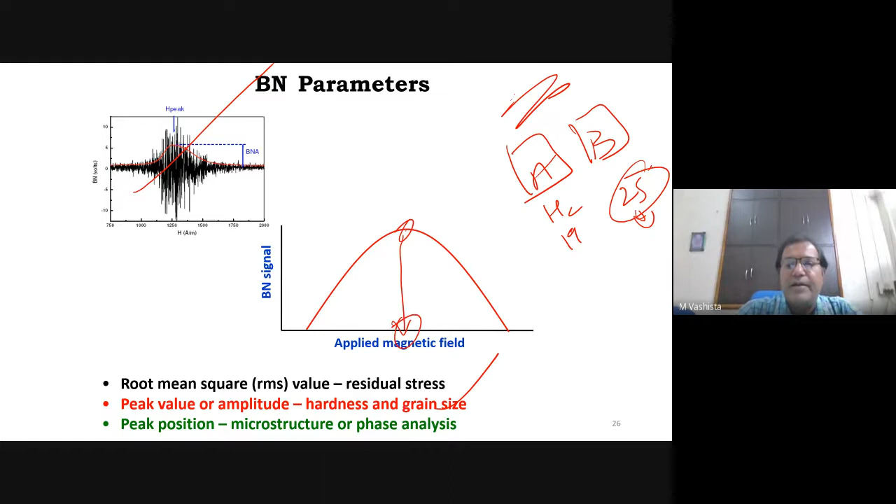Similarly, peak position means the position of this peak on the x-axis. This indicates input; applied magnetic field is the input. So if I have two materials, A has martensite structure and B has ferrite structure. Ferrite structure means soft magnetic and martensite means hard magnetic. If the material is hard magnetic, it will require more input. So if I get the envelopes from A and B, martensite will produce this type of envelope. So from the shift in peak position, I can identify the microstructure. With this technique, we can identify microstructure and micro hardness also.

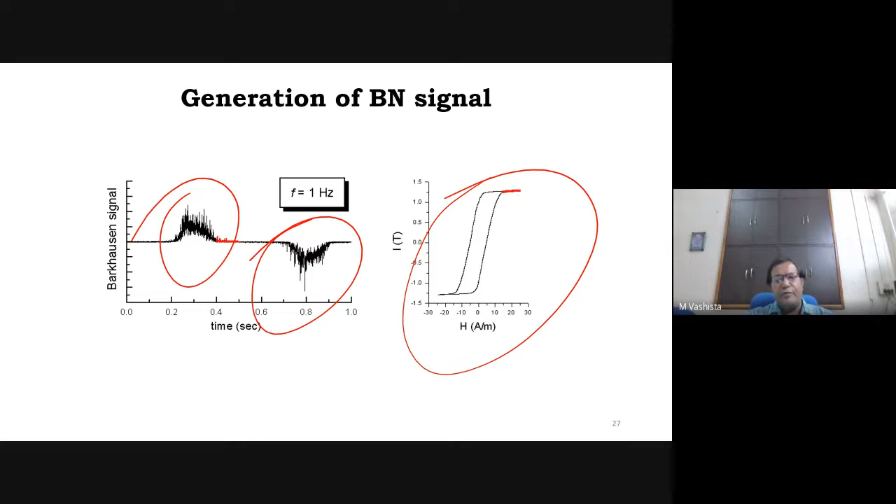Barkhausen noise signal is a magnetism-based phenomenon, and magnetism is also correlated with the hysteresis loop. The hysteresis loop is also generated during magnetization. Whenever I magnetize any material, I have to apply a magnetic field. When I apply the magnetic field, the domains of the material will try to align themselves. So the magnetization will increase like this. This motion increases the magnetization inside the material, but what will happen if I reduce the magnetic field?

From this point, if I reduce the magnetic field, the initial path will not be followed. The path will be like this. And if I again increase the magnetic field, I will get this path. So this magnetization process and this demagnetization process will create a loop, and this loop is known as the hysteresis loop.

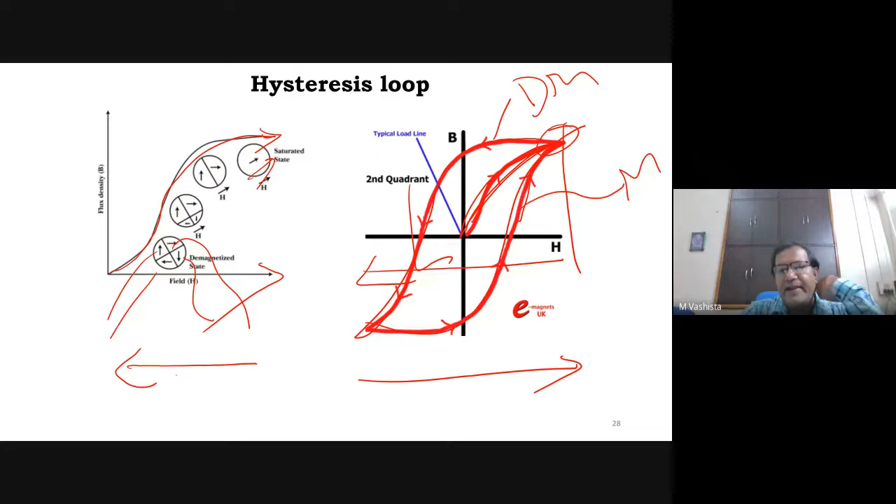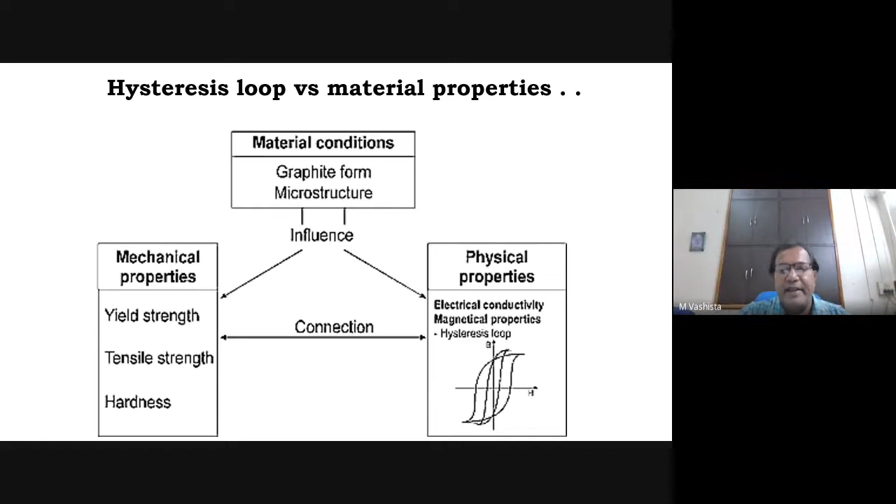Hysteresis loop is indicating the magnetic property, and these magnetic properties we can correlate with the mechanical property. How? First, consider the generation of Barkhausen noise signal and hysteresis loop.

Considering this x-axis as applied magnetic field, it is the input, and this is the output. Generation of Barkhausen noise signal is the output.

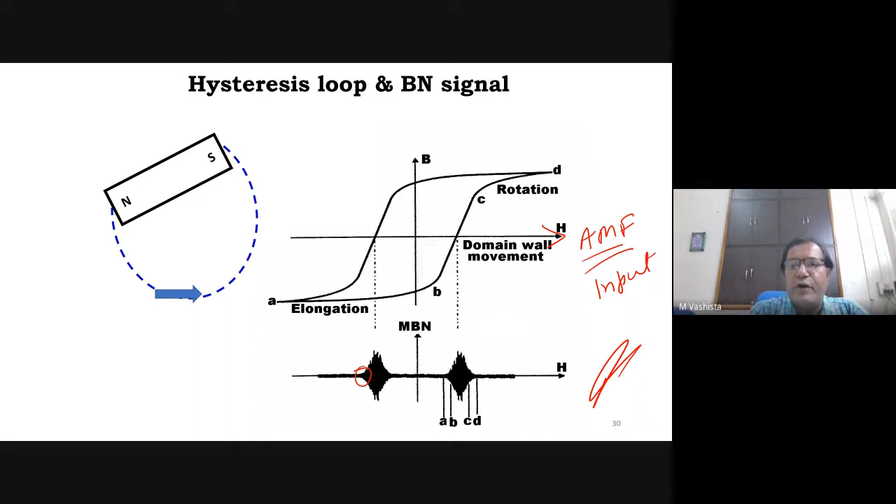This all pin, when it comes into the effect of magnetic field, what will happen? This all pin will get elongated. So this is the elongation of magnetic domain. Remember, this A to B portion is indicating the elongation. So for this elongation, I have to apply this amount of input, and I am getting this much output. Generation of Barkhausen noise signal is this much.

But magnetic domain movement, this is the domain wall movement. This domain wall movement is occurring from B to C, and this will require only this much input. So I can say this much input will generate this large portion of the Barkhausen noise signal.

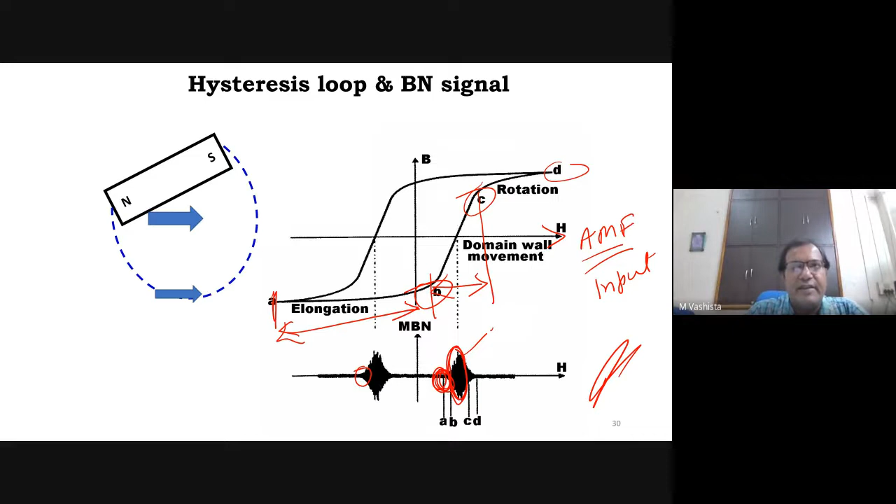And the third one is the rotation. You have also seen that when all pin touches the magnet, it will not remain in this position. It will rotate itself and make full contact with the permanent magnet. So this is known as rotation. The rotation is from C to D, and this C to D is having this much amount of input, and it is generating this much amount of signal.

So I can say that B to C is the magnetic domain wall movement, and this is mainly responsible for generation of Barkhausen noise signal. If I apply more amount of energy to this B to C portion, the signal level will rise.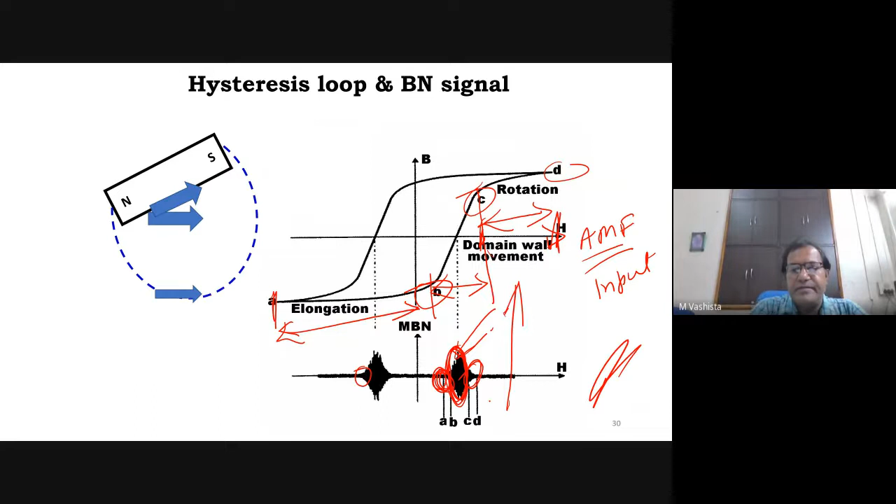Hysteresis loop characteristics like remanence or coercivity, and one more property hysteresis loop is having, that is permeability. Permeability is the slope of tangent at the knee. These intersection points with x-axis and y-axis will indicate remanence, coercivity, and the slope of the tangent at the knee of hysteresis loop will indicate permeability.

These properties, coercivity, remanence, and permeability, will give mechanical property. So we can assess the material, we can characterize the material by using magnetic property easily, and this technique is safe also.

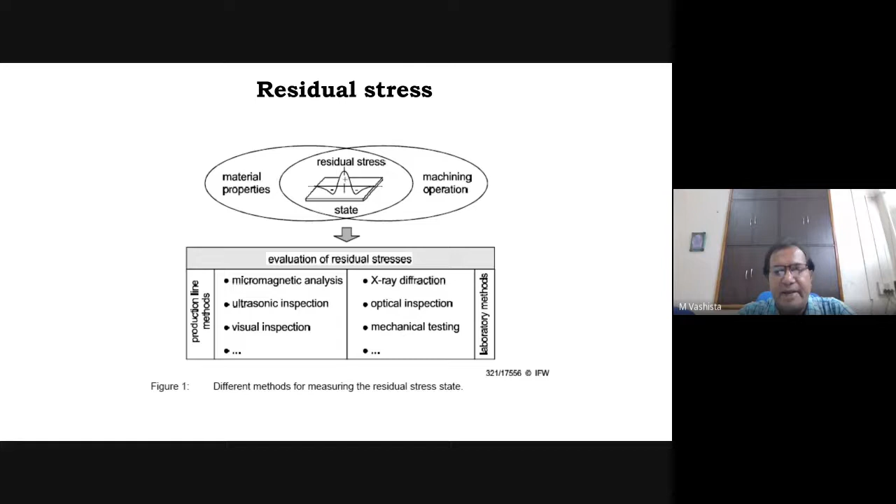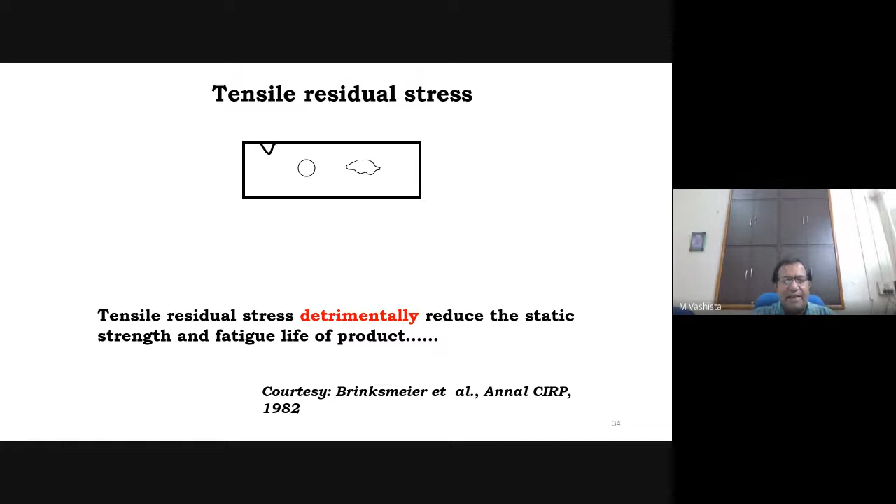For residual stress, remember the residual stress is very detrimental. We have seen that tensile residual stress should not be there. If tensile residual stress is present, it is detrimental. So we have to assess the residual stress. X-ray diffraction technique is there. Tensile residual stress is very much detrimental because it will enlarge the irregularities present in the material, like this.

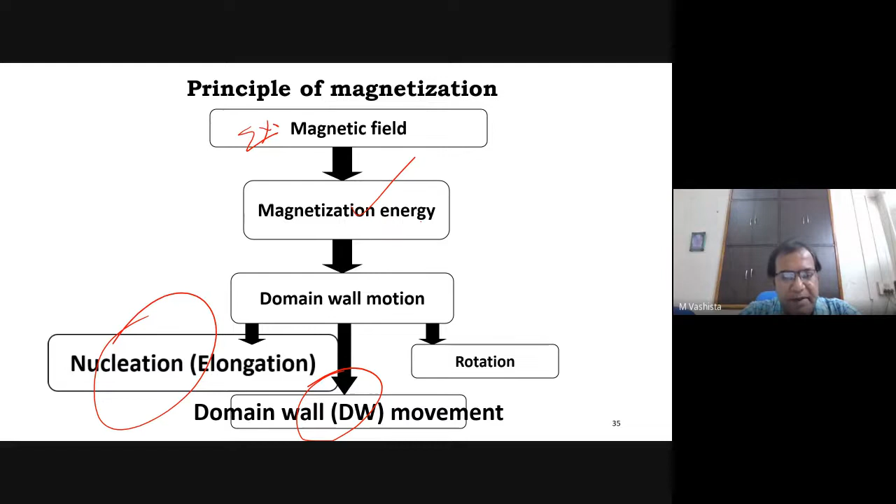How will it be used for assessment of residual stress? Same block diagram I am considering, but I told you that if the material is having tensile residual stress, porosity will increase, crack will increase, voids will increase.

But remember, this tensile residual stress will not be biased. It will not differentiate that I have to elongate the void and only elongate the porosity. It will elongate each and everything. Each and everything means it will also elongate the domain wall. If domain wall is present inside the material, it will also be stressed or elongated by tensile residual stress.

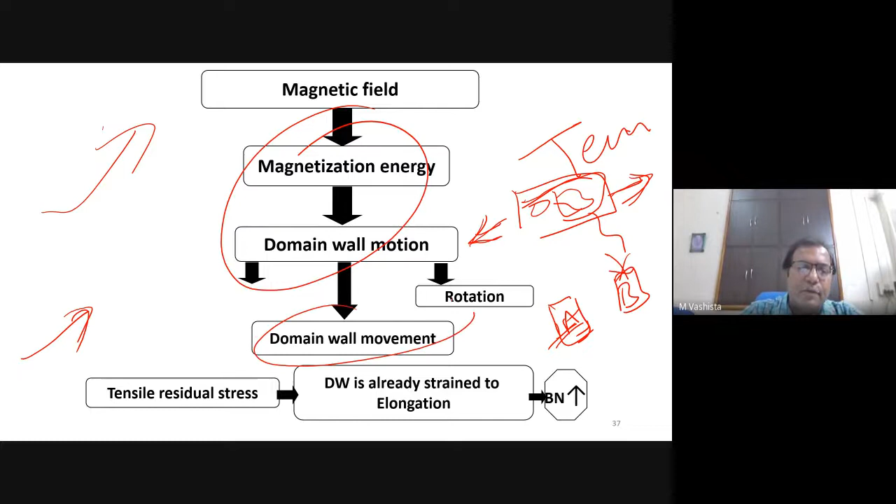So this portion of domain wall motion will be executed by tensile residual stress. So if I am having 2 components, A and B, A is not having grinding operation and B is having grinding operation, what will happen if I get the Barkhausen noise analysis of A sample? In A sample, this energy portion will be there. But if I apply Barkhausen noise analyzer on B, then on B, this elongation part has been carried out by tensile residual stress. So the same energy will be used for domain wall movement, and this domain wall movement will get more energy. So the Barkhausen noise signal will be more.

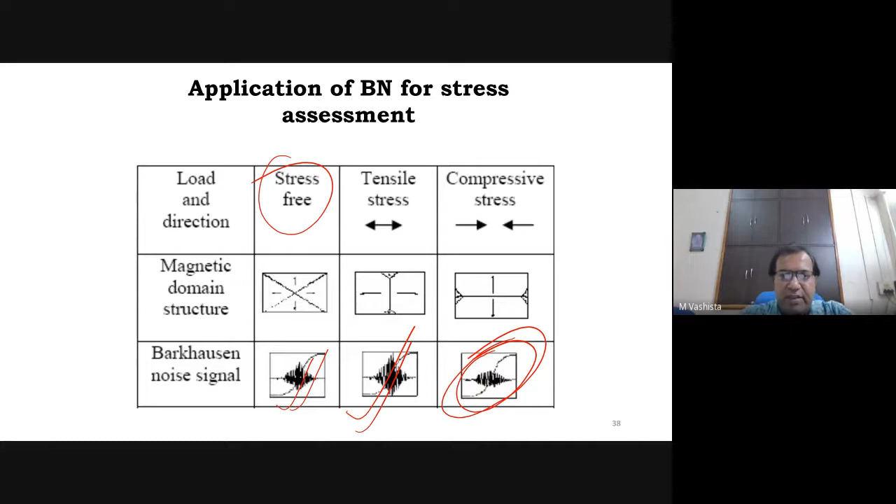Schematic diagram indicates that tensile residual stress will increase the Barkhausen noise signal level. This is the Barkhausen noise signal level from as-received material or a stress-free component. If it is having compressive residual stress, then definitely the level of Barkhausen noise signal will significantly reduce. So by using this technique, we can also assess the residual stress.

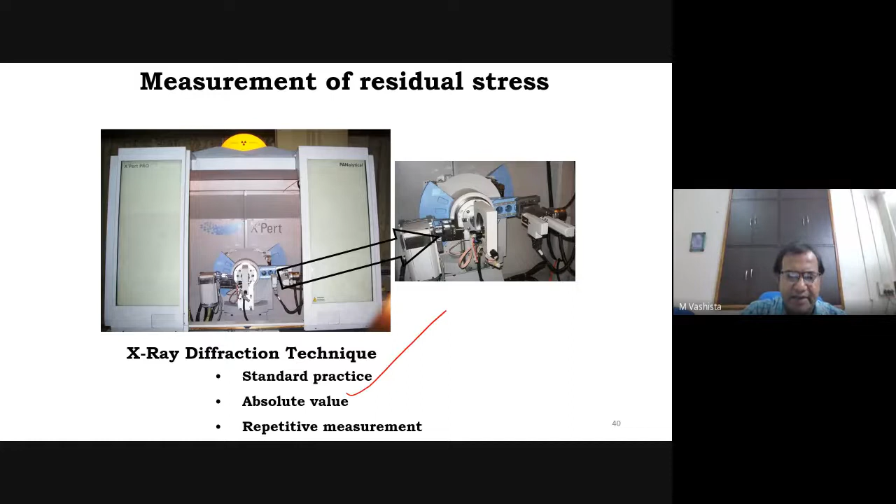X-ray diffraction technique. This is the X-ray diffraction technique. It is a standard practice for assessment of residual stress, but in this case we use X-ray, and by using X-ray and the Bragg's law we can find out the magnitude of residual stress. But this technique is not...

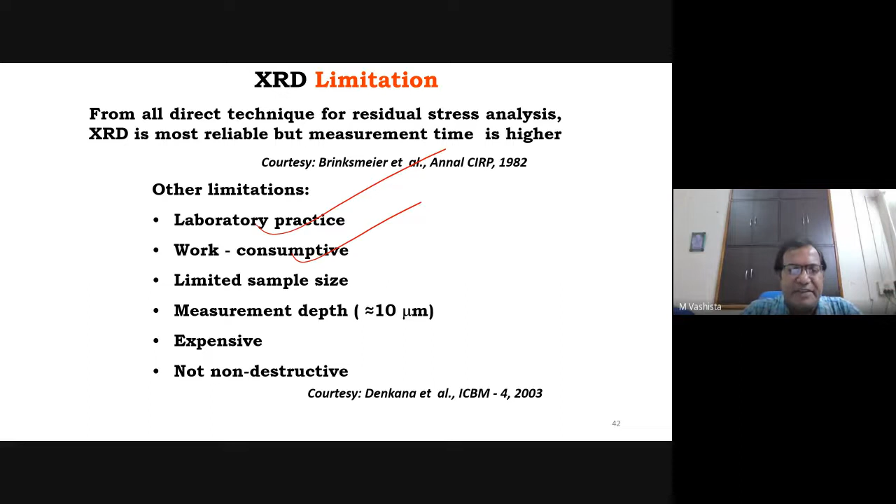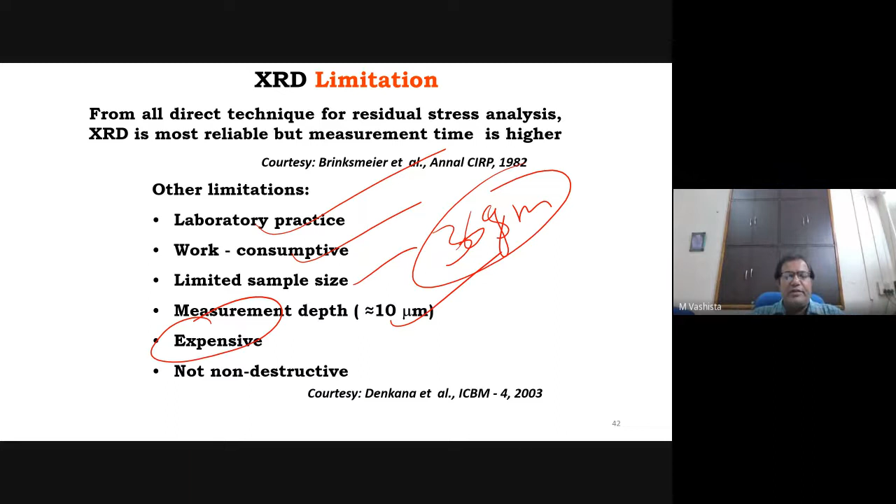eco-friendly, and this is a laboratory based technique. It takes a lot of time - 56 minutes is typically required to scan a sample in an X-ray diffraction machine. Sample size is limited; typically 35 or 36 gram sample is to be mounted on the holder of the machine. The measurement depth is less. The technique is expensive - 1 crore rupees is the equipment cost - and this technique is not non-destructive in nature.

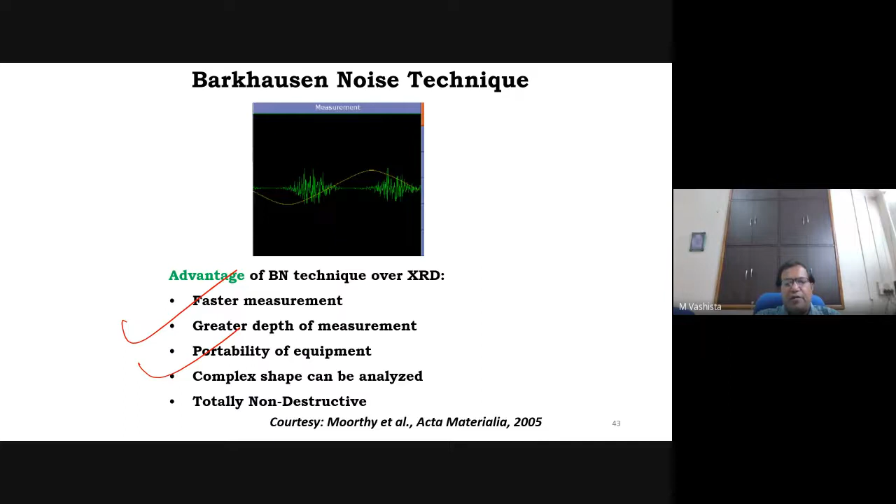On the other hand, the Barkhausen noise technique provides faster measurement, portability of equipment is there, and this is eco-friendly because only magnetic field is used, and magnetic field is not harmful for the operator or the user who is using this Barkhausen noise analyzer. We can change the depth of measurement.

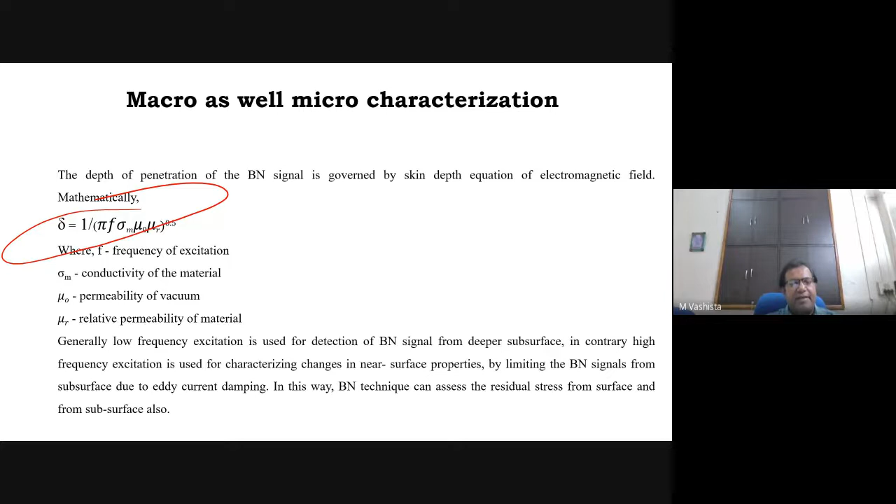How can we change it? Because the depth of penetration of magnetic field is governed by this mathematical expression. In this mathematical expression, only the magnetic frequency is there. So by using this magnetic frequency, I can change the depth of penetration as per my requirement or as per my wish. I can increase the magnetic frequency or I can decrease the magnetic frequency. By increasing and decreasing the magnetic frequency, I can change the depth of penetration.

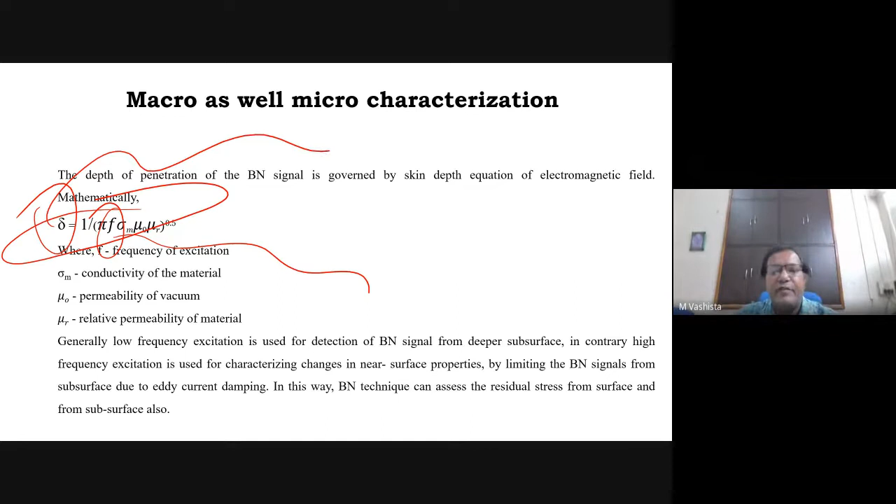Nowadays it is an emerging technique. This technique is available in India at BARC Mumbai. IIT Kharagpur is also having this technique. Our institute has recently procured this technique.